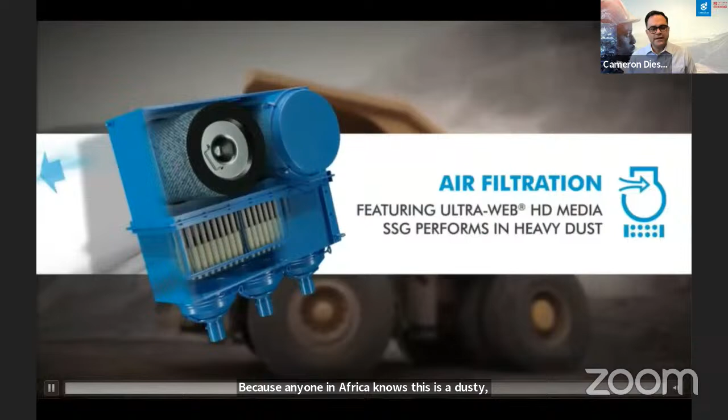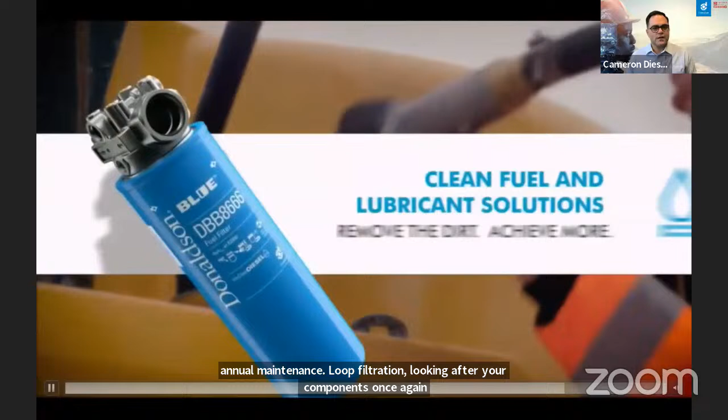So what we're going to start with is just a video showing, at a very high basic level, an overview of our service offerings, just setting the scene here. The first product you will see is air filtration, because anyone in Africa knows this is a dusty, corrosive environment. Air filtration protects your engine, keeps the dust out, keeps your engine functioning well. Critical to success. Fuel filtration, we need clean fuel to optimize your running and your maintenance. Lube filtration, looking after your components once again. Hydraulic filtration. And last but not least, clean fuel and lube solutions to make sure the fuel is clean before it goes into your system. So those are just some of the products that we do.

Moving on to the webinar for today and the topics we're going to cover. What we want to look at is reducing maintenance costs and increasing equipment uptime. In the second bullet point, you'll see the phrase total cost of ownership, and our aim at Donaldson is to reduce total cost of ownership for mines operating. One of our partners that do that, AES, will present on their customized service model and their partnership strategies to bring these benefits to their customers.

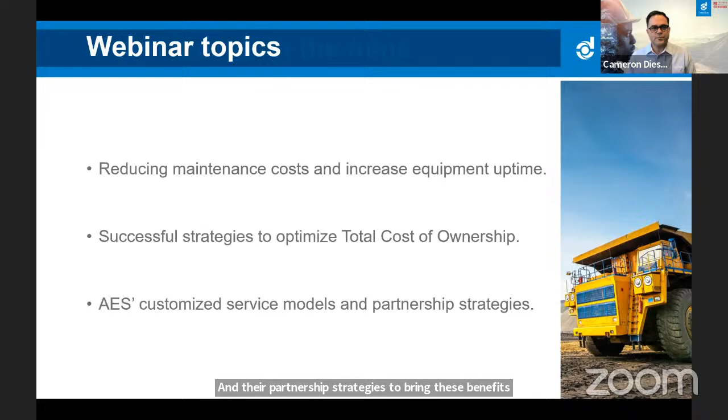A phrase that I really like, given to me for this presentation, is from the lab to the mine. Donaldson, we have all sorts of certifications that I'll talk about at the end of the presentation. We are a global company, global technology, innovating, but that means nothing to people operating on a mine. We know that the difference is made on the mine site, and that's key to us. What we want to show is how we apply validated filtration technology to optimize these mining operations, and of course, how filtration technology has the potential to advance your business.

We also think that after being in Africa for more than 50 years and operating primarily in mining, we do understand some of the challenges our customers face. Operational efficiency and uptime is always given to us as a challenge for a mine site. We know the penalties on mine sites for equipment being down, we know what those lost hours cost the mine, and we know that we need to keep machines up and running.

In dealing with that, we generally look at and improve long-term operational cost reductions—reducing total cost of ownership, as we say at Donaldson. A key for us globally is improved overall sustainability, and we believe the efforts we make on your mine site improve your sustainability while we keep that clearly in focus.

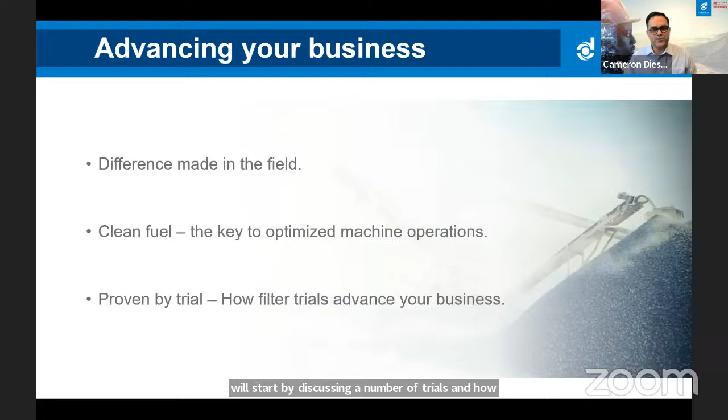A key takeaway as well will be clean fuel. We know this is key to optimizing machine operations. You need clean fuel on site to get maximum efficiency, and that's what we look at giving you. So what I'll do from here is hand over to Paul, who will start by discussing a number of trials and how applying endurance filters and various Donaldson technologies in the field has brought benefit to his customers, with examples of case studies we've put together.

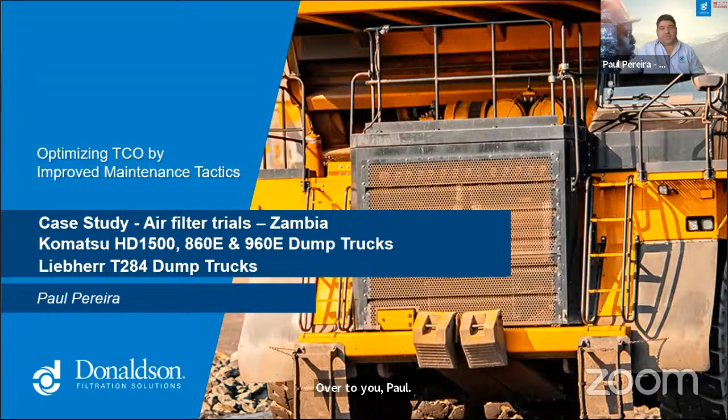Secondly, Donaldson works through a distributor network and partners globally, as Cameron mentioned. We support them as they are an extension of us, so they can offer you, the end user, the best solutions, on-the-ground support, expertise, stock in country, and so much more. We cannot do it without them, so a big shout out goes to the distributor who played a vital role in the success of this trial.

So let's get on with the case study. The case study is on air filters specifically today. We were talking about the Komatsu 860E, 960E dump trucks, and also the Liebherr T284s. So let's move forward.

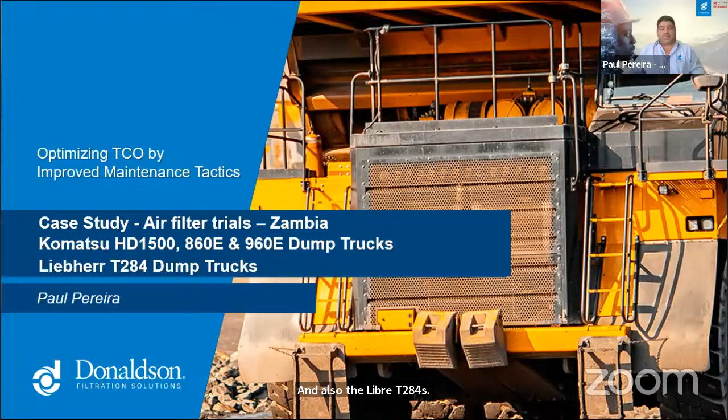The mine's challenges, what they were experiencing, was frequent maintenance which caused lots of downtime, high filter usage which means high filter wastage, and changing filters at 500-hour changeouts. They were on a cost-saving drive, and we wanted to help them save costs. So we suggested increasing service intervals. They asked how, so we said, let's do a trial—we'll show you how.

As a result, and just make note of this number and take note of the time frame, the result was a $75,000 savings only on the air filters—the 2 air filters on each machine—over the time frame of this trial, which was around 5 months.

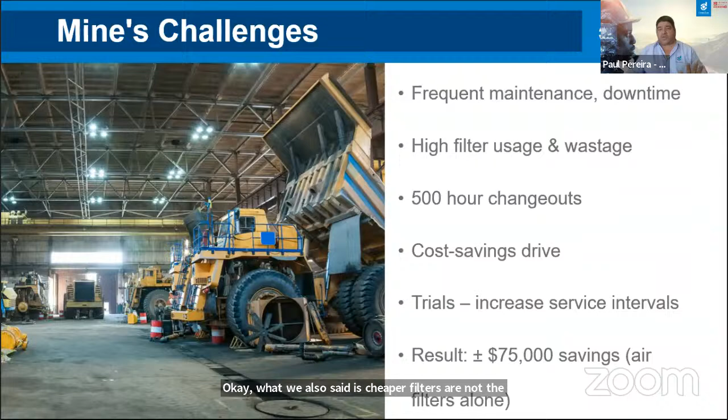What we also said is cheaper filters are not the answer, rather work on efficiency and changing based on restriction in this case. So what was the scenario on site? The scenario was that the covers were not Donaldson's, so we reintroduced our filter back into the will-fit part, which was our Donaldson SSG housing.

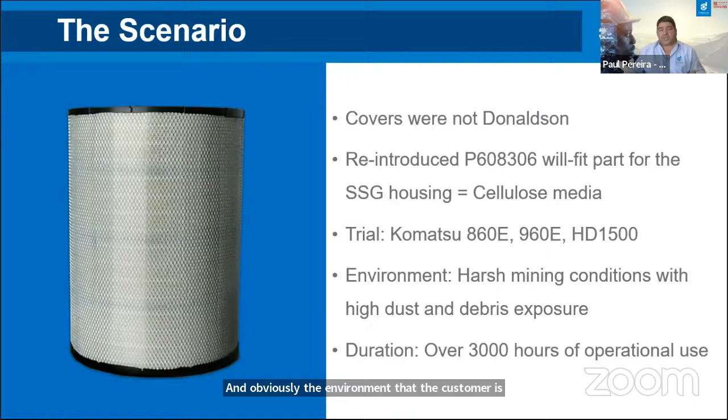It is a cellulose media filter. We did the trial on the 860E and 960E Komatsus, and obviously the environment the customer is working in is harsh mining conditions with high dust and debris. As for duration, we found we got over 3,000 hours of operational use on one single filter.

Some 'why' factors—you're asking why. Customers ask, why change? What are the benefits? How will this help us? Some of those are mentioned on the screen: reducing your component failure—you guys are going through lots of spare parts, lots of injectors. We want to extend your equipment life, minimize the downtime, and maximize your filter lifespan.

We want to increase your vehicle performance. We want to enhance the maintenance practices on site. We want to boost your environmental impact. Less filters, less waste, better cleanliness for the environment. And obviously, we want to strengthen your TCO value.

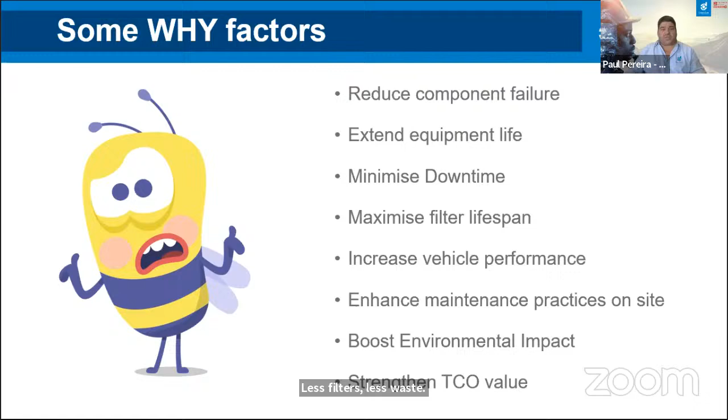I mentioned earlier about efficiency. Efficiency is something that people don't really understand, and beta ratios, so we just want to go through it so that you can understand it a bit. Efficiencies are usually printed on our cans, or it's on our website. Most websites do not have it though - I'm talking about the competition - and sometimes you've got to ask yourself, why is it not on the website? So just make a note of that.

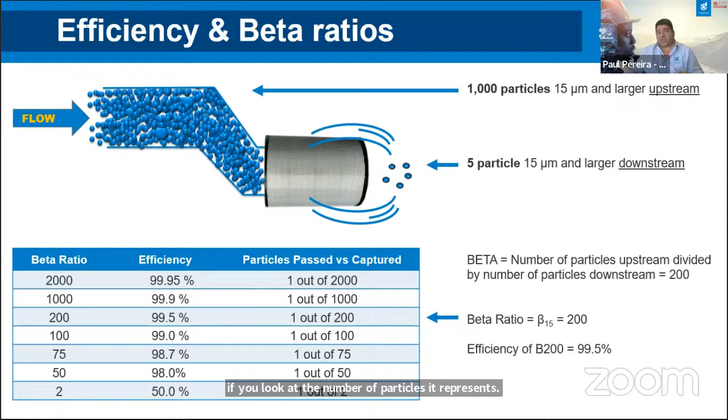We'll move over to the Donaldson First Fit. As you can see, this is a picture of a machine with a filter housing. This is actually a Donaldson housing. So we are also filter manufacturers, but also First Fit for OEs. So we actually manufacture this housing.

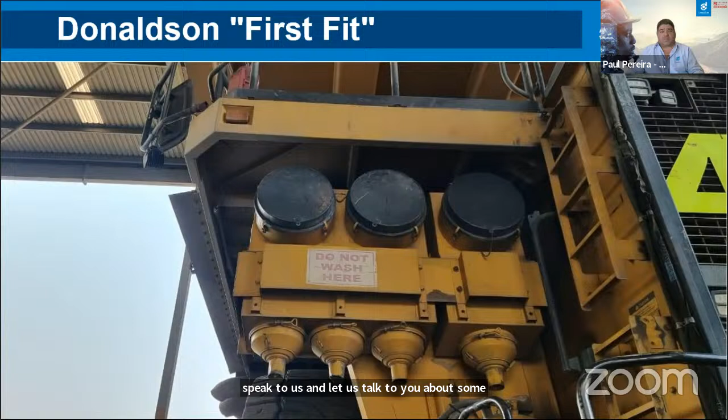This filter housing has got a pre-cleaner inside, and you can see that by the 4 little things at the bottom there, where the pre-cleaned air actually exits. So that's quite a nice thing to note. Up to 90% of all the dirt that's collected passes through the Donaldson system and exits before it actually hits the filter, so it's also saving your filter lifetime. If anybody on here has equipment that you don't know has Donaldson pre-cleaners available, and you're going through a heck of a lot of filters, speak to us and let us talk to you about some pre-cleaners. We can add evacuator valves at the bottom as well, which will help prevent the clogging of moisture.

So the primary filter and the cover that was installed on the actual machine, as you can see - sorry, I'm looking at the wrong screen - the filter has a steel cover, and this cover here was actually a lot thinner than ours. So what we did is we reverted back to the Donaldson one, which has a cone, and the Donaldson cover, which also has a cone. So that obviously keeps the filter in place a lot better.

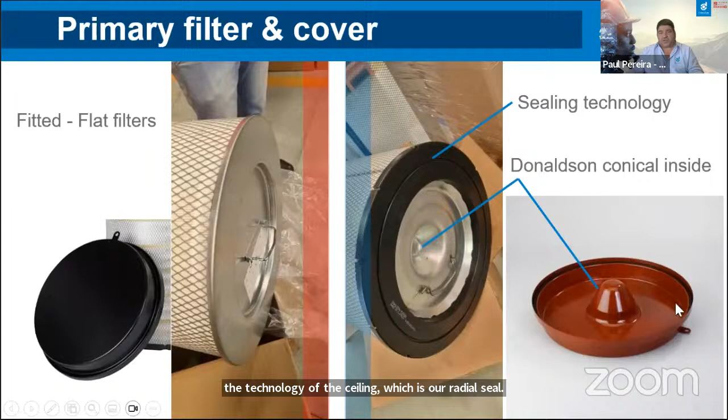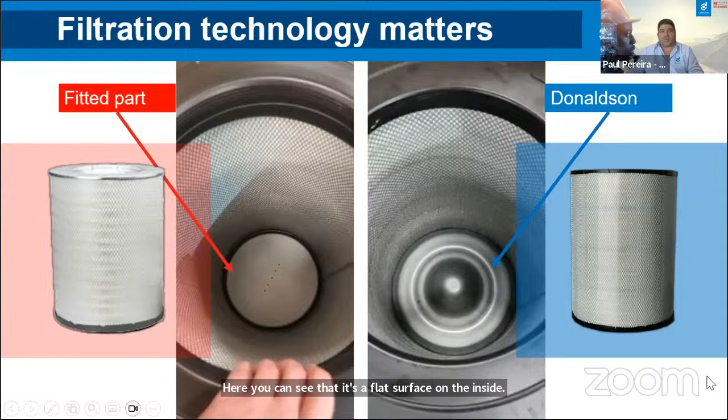And the technology of the sealing, which is our radial seal, also makes it a much better sealing surface. Here you can see that it's a flat surface on the inside of the filter that was fitted, and ours you can see obviously the cone. You'll see that the media is a white color, which tells you it's a cellulose filter. The old axial seals versus the radial seals - you can see the difference here.

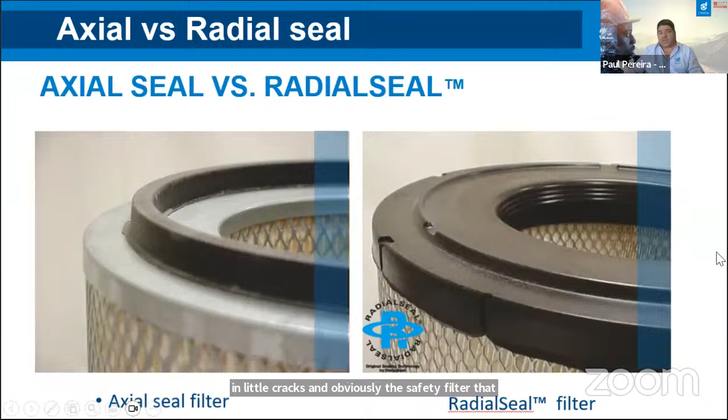The old axial seal system had a seal glued onto it, where the new system is just a polyurethane seal right around, which also holds the filter in place. But if there's a slight deviation on the seal housing or on the housing, it will touch on the whole surface of the seal. So your sealing is much better. There won't be any air coming through in little cracks. And obviously the safety filter that fits on the inside will also have a much better sealing.

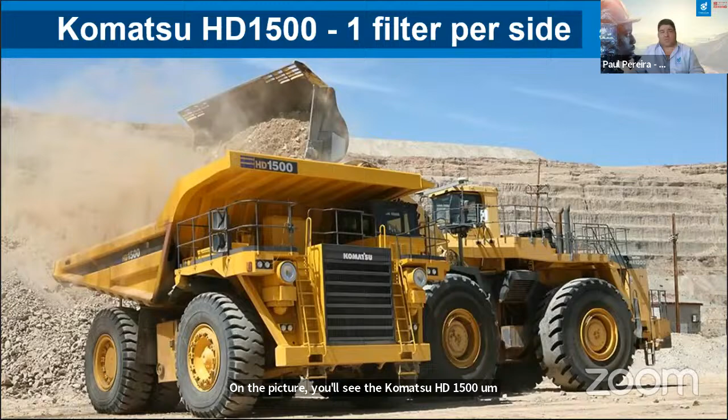On the picture, you'll see the Komatsu HD 1500. It has one filter on each side, so only 2 filters for this machine. On the Komatsu 860E, there's 2 filters per side. On the Komatsu 960E, there's 3 filters per side.

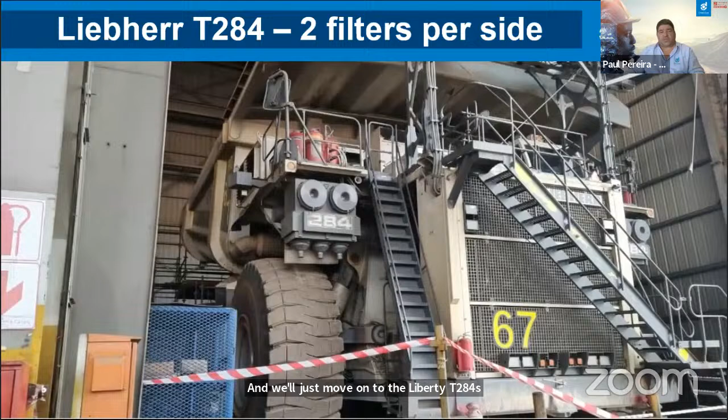And we'll just move on to the Liebherr T284s, which has 2 filters. You'll notice on the T284, you can see the dome. On the other machines, the dome is actually welded into the cover, so you won't actually see them. Some of them do come with the dome visible.

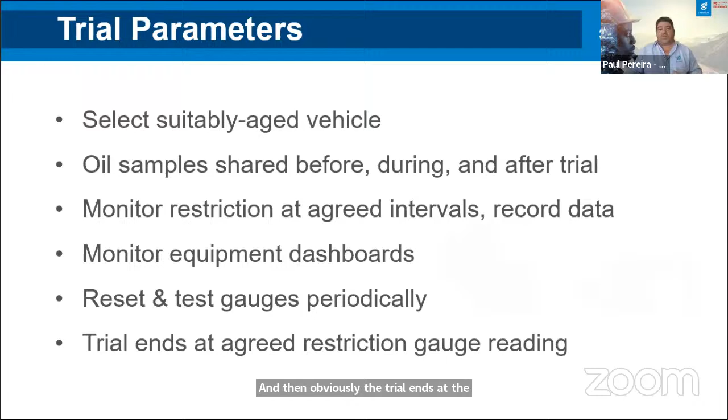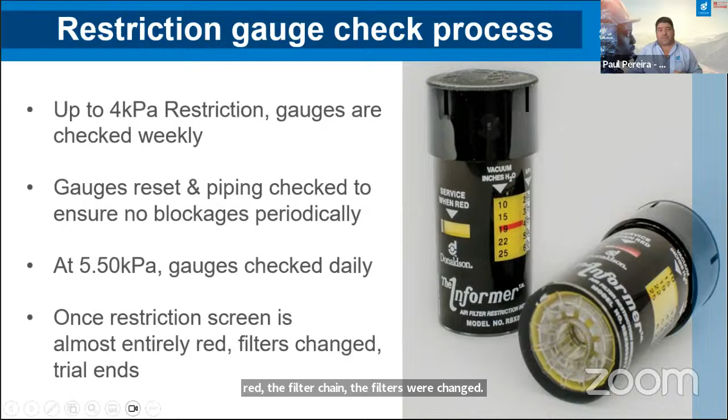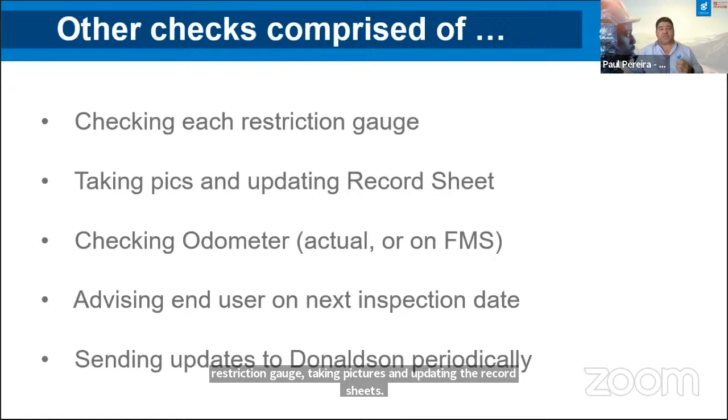Once the restriction screen was almost entirely red, the filters were changed and the trial was deemed as ended. In terms of the other checks, again, checking restriction gauge, taking pictures and updating the record sheets, checking the odometers or taking the actual readings from the FMS system, fuel management system, advising the end user when the next inspection date is, and sending updates to Donaldson as well periodically.

This is what the distributor did, our partner. They painted the covers in their colors and put a big sticker on to say, please do not change. They made nice boxes for the restriction monitors to be installed in. At the bottom here, you will see that they also did the exhaust tubing, or the tubing from the exhaust to go towards the restriction indicators. They labeled the filters or number them with the date so that they know when that filter was installed.

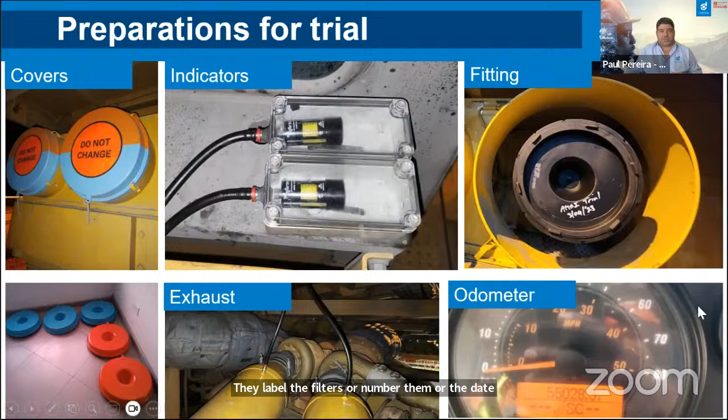You can see the other pictures there just for your info. Let's go to the actual trial results.

The first one we're going to talk about is the 860E. All the trial results will look very similar. So what we do is we start the trial. In this case, it was on April the 3rd.

On April the 11th was the first check. We skip a few and go to check number 4. The filter was already at 500 hours, still not reached restriction. Skip a few, go to check number 8, 996 hours, all still going well on May 30th.

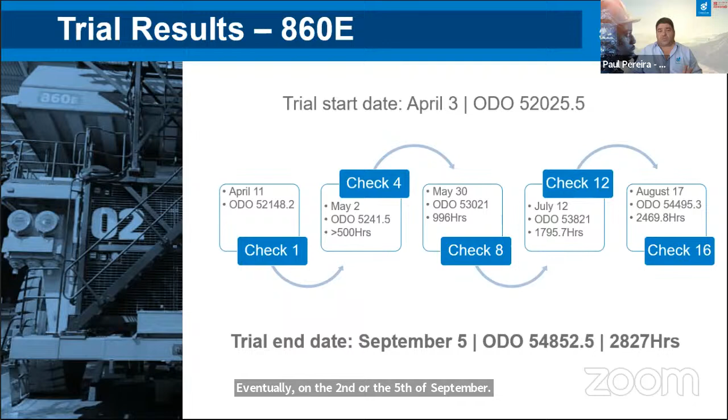Skip a few to check number 12, July the 12th, 1,800 hours almost. Check 16, the filter was sitting at 2,469 hours. Remember, practice on site is to change at 500. Eventually, on the 2nd or 5th of September, the restriction monitor was full, and they decided to change out at 2,827 hours on the filter.

What they did is they plotted the actual restriction monitor readings as well on a graph. You will notice here that one is slightly higher than the other. Depending on which way you drive on the mine sites and where you are in the world, we drive on the left sometimes or the right. So one filter always picks up the dirt from the other truck that's passing by, and that's why a lot of the filters have one side that is always getting restricted a little bit quicker than the other side.

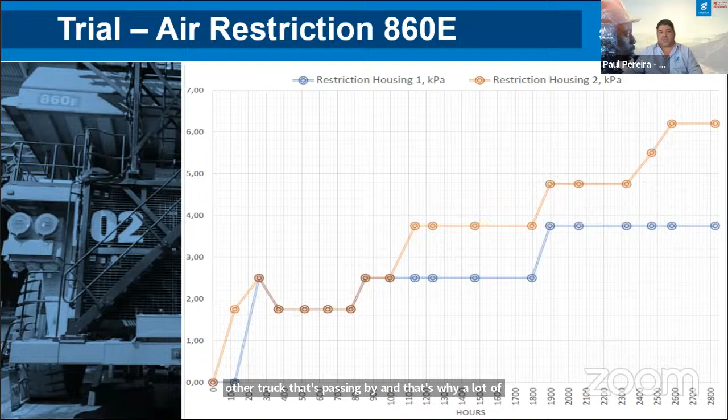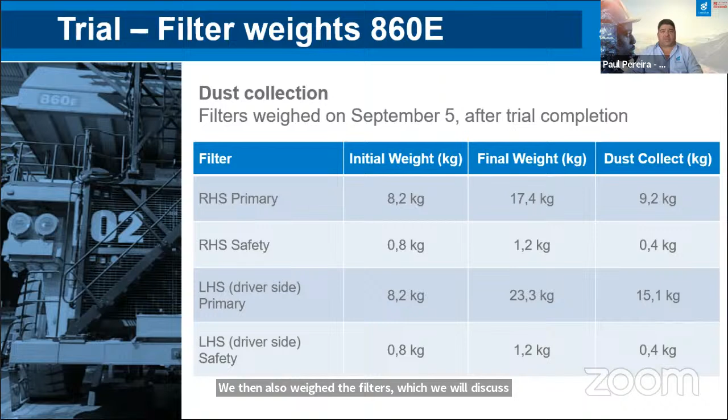We then also weighed the filters, which we will discuss towards the end. We're not going to touch too much on that, but you will see some interesting stats. The summary on the 860E was the filter got to 2,827 hours over a 5-month trial period.

The previous changeouts were at 500 hours, noting that this is a cellulose media filter, and also to note that the competitor's high efficiency filter was no comparison even to our normal cellulose filter. During this period of 5 months, where the customer had to change it every 500 hours, we saved the end user almost 5 filter changeouts, which was at a cost of $1,850 per vehicle, which is 5 primary filters and 2 safety filters.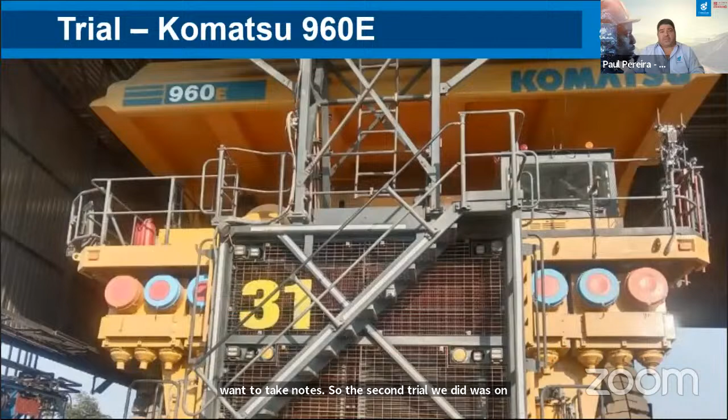We will go through those numbers later on as well if you want to take notes. So the second trial we did was on a Komatsu 960E this time. Again, same story. We did the trials, started on September the 10th. Check 1 was done at 62.1 hours.

Check 4 at 770 hours, sorry. The restriction monitor still hadn't moved. So imagine changing the filter at 770 hours and that restriction monitor is telling you the filter's not even started to get clogged yet. What a waste that would have been, if you understand what I mean by the filling up the fuel analogy.

December the 5th, 1,441 hours, 2.5 kPa on the one, 6.2 on the other restriction monitor. Check 14 on February the 12th, 2,801 hours, both restriction monitors eventually showing that it was full.

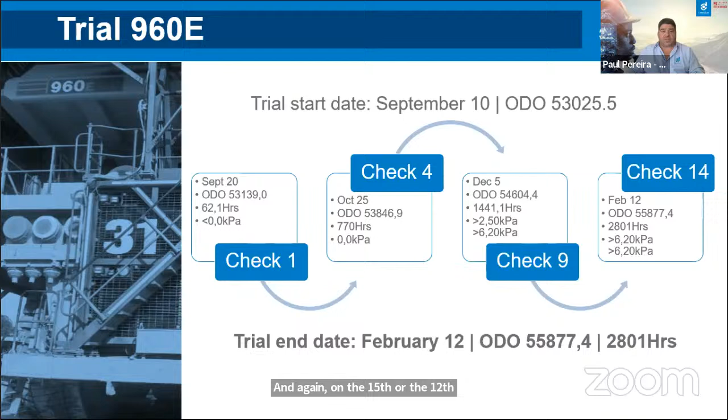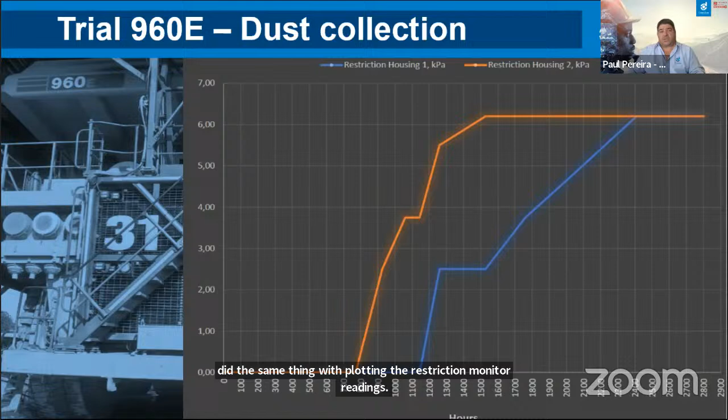Again, on the 15th or the 12th of February, eventually the trial was ended at 2,800 hours. They did the same thing with plotting the restriction monitor readings over the period, and you can see towards the end, they were eventually changed and they actually met up at 6.2.

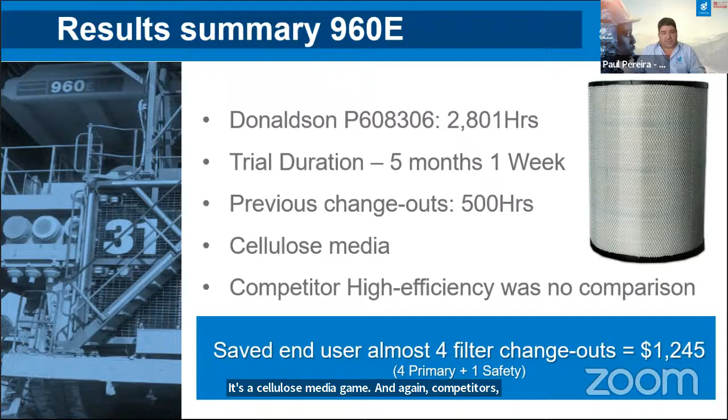The results summary, we reached 2,801 hours on this trial. It lasted 5 months and a week. It's a cellulose media again. The competitor's high efficiency filter that was on site was no comparison to our standard cellulose media. During this time, we saved the end user almost 4 filter changeouts, which is an equivalent of $1,245 per vehicle, which was 4 primaries and 1 safety.

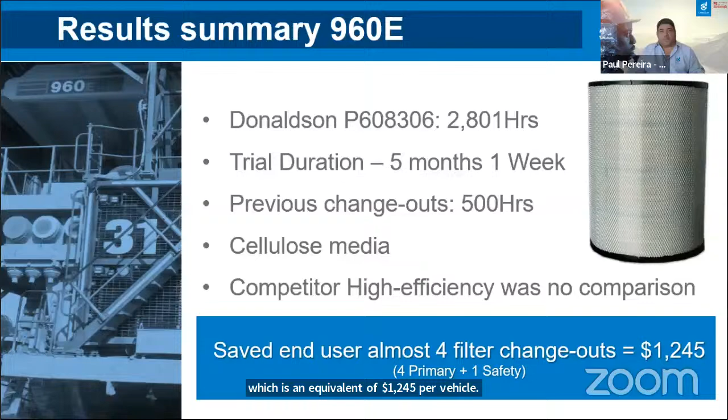Because of the success, the end user eventually said, let's do the trials on the Liebherr T284. The T284 was not considered at the time. We used the Donaldson blue filters on this trial because the OE was using the equivalent of the high efficiency filters, so we did it like for like.

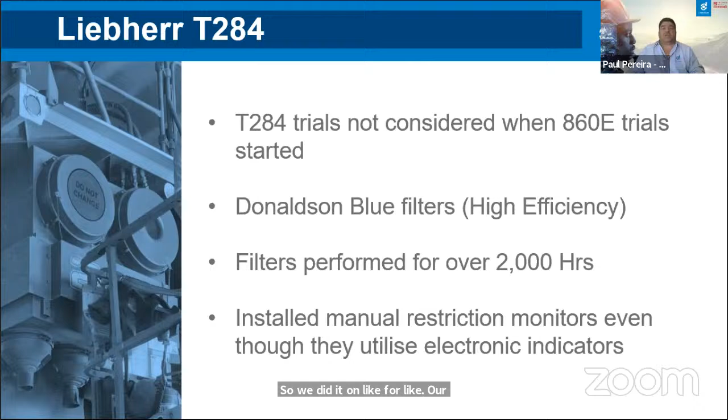Our filters performed for over 2,000 hours, and we also installed manual restriction monitors on these machines, even though they have the electronic indicators on the machines. Again, same story, June the 1st, we started the trial.

June 22nd at 416 hours, we did a check. August the 8th at 1,288 hours.

You could see the restriction monitor starting to show some restriction. September the 12th, 1,934 hours.

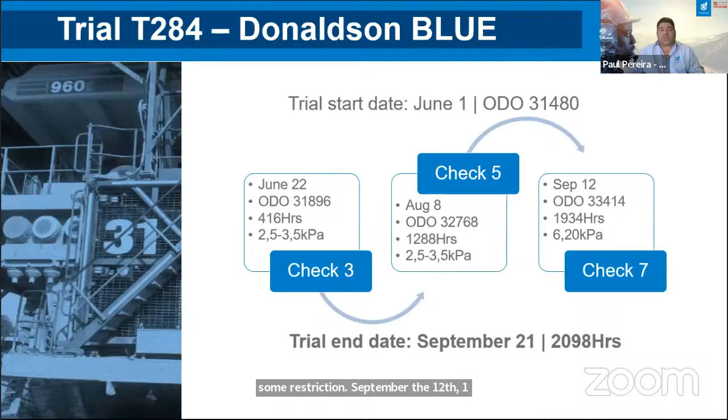They did another check, and in this case, the T284 dash, there was no signal to change the filter when it was at 6.2 kPa on the actual dashboard at 1,934 hours.

It wasn't time to service the machine, so the end user pushed it until the next service, and the next service was at 2,098 hours. The filter was still working perfectly fine, wasn't causing any starvation, etc.

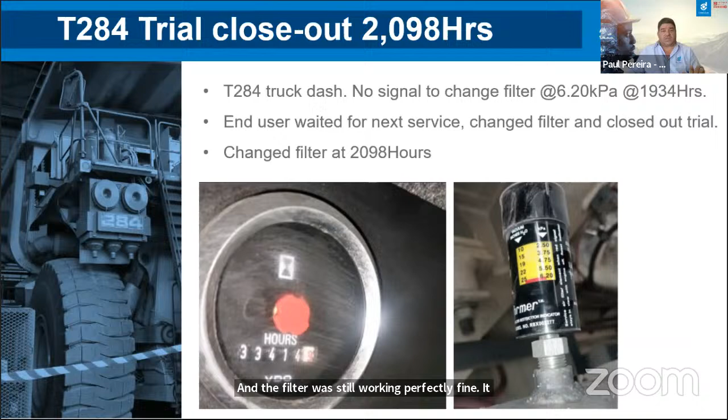No overheating on the machine, so everything was still perfectly fine, and we changed it out at 2,098 hours.

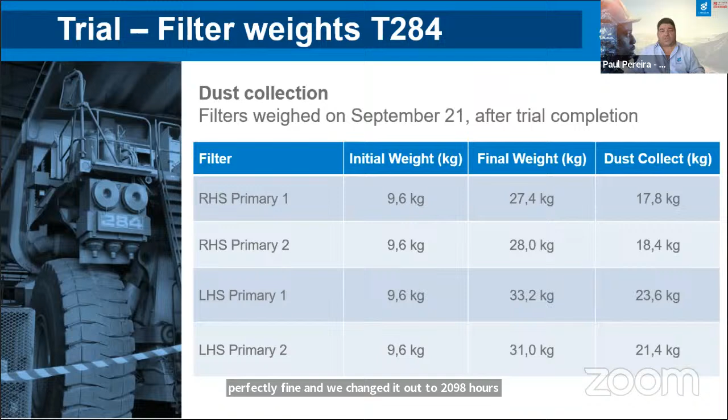Dust collection on this was as per this little screen, and we'll go back into it on the next screen because I'll touch on all three results in a minute.

The DBA, which is Donaldson Blue Air - you can see the media here is blue. The normal cellulose filter is a natural product, so that's why it's white. The Donaldson Blue product is a synthetic media, and that's why we call it the blue media, and that's why it's called the Donaldson Blue range.

This trial duration was 2.5 months, and we saved the end user 3 filter changeouts on this one, at a value of $1,840 per machine, which is 3 primaries and a safety.

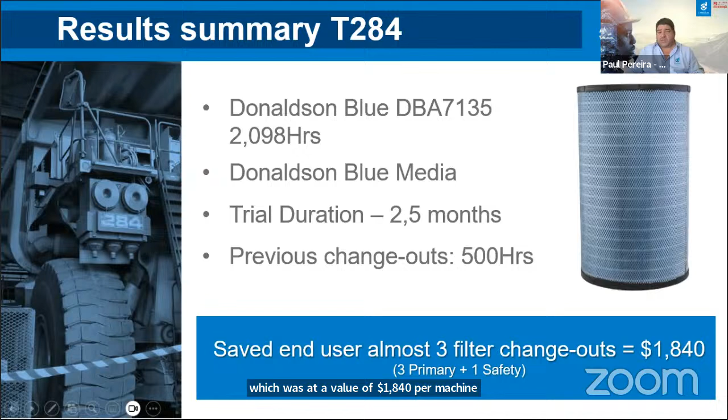So here comes the interesting part. When we talk about the Donaldson Blue range, it's depth filtration. You hear all of these fancy words - here we can see it on the actual trials.

So the first 2 filters, the white ones, were cellulose filters. The T284 used the blue filter. Over the similar time period, the dust collected on the cellulose was 9.2 and 15.1 on the 860E. On the 960E, 11.9 kilos, 8 kilos, 7.3, etc.

And look at the blue filter - over the same time period, look how much dust was collected in comparison to the cellulose media.

So this is where your depth filtration really comes into work, and that's where we'd like to explain to you guys how exactly that works, and this is where a lot of efficiency comes in. As you saw by the screen earlier, where that small percentage, 99% and 99.5%, seems very small - here you can see how big the difference actually is with those little numbers.

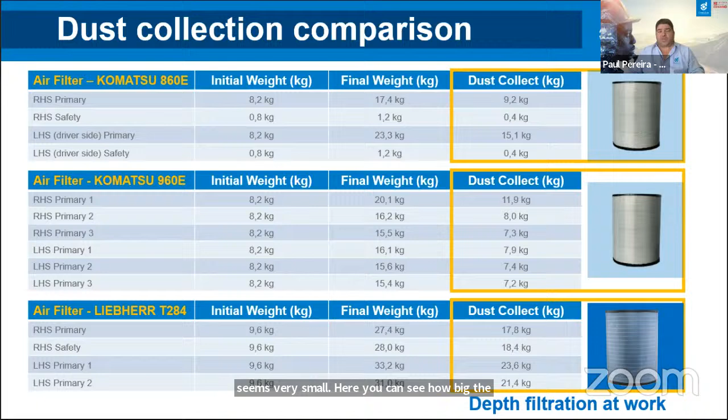Remember, we can actually double this number for the T284s because we're only at 2.5 months. So we can actually double that amount. It was a saving that was done over 5 months only, not a full year.

And it was a saving only by changing the air filters. Now remember, these exclude savings on downtime, labor, financing of filters - because a lot of mines like to keep lots of stock of filters - and any other unseen costs: $74,000.

So if you're looking to save money, this is how we can show you how to do it. And this is not even talking about our liquid filters, our hydraulic filters, our lube filters, etc. Lifespan of the machine doesn't even come into these calculations yet.

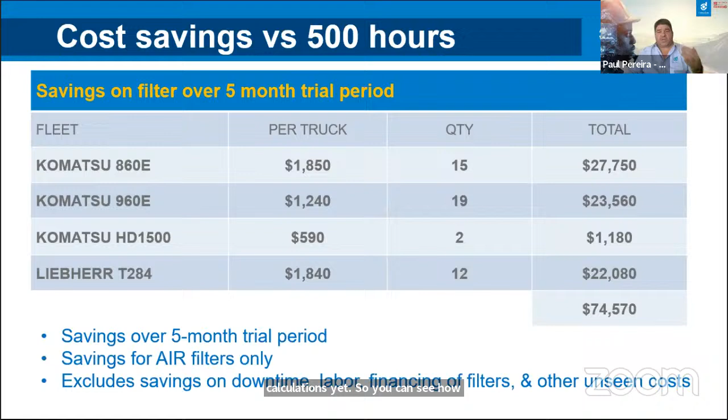So you can see how TCO actually starts kicking in by not looking only at the price of a filter. In summary, the cost savings were evident, the service intervals were dramatically increased, the mine's efficiency and productivity was enhanced, and the end user was more informed and empowered by knowing and learning all these things from us.

The trust in Donaldson on site was increased exponentially, and the TCO - in conclusion, we'd like you guys to understand and work on efficiency and TCO as the key, and not the price of the filter.

Ask your Donaldson distributors and partners for solutions to your challenges, and we will assist you. And like I said before, Donaldson is 110 years old, and I can give you 110 reasons why Donaldson should be your partner to success going forward.

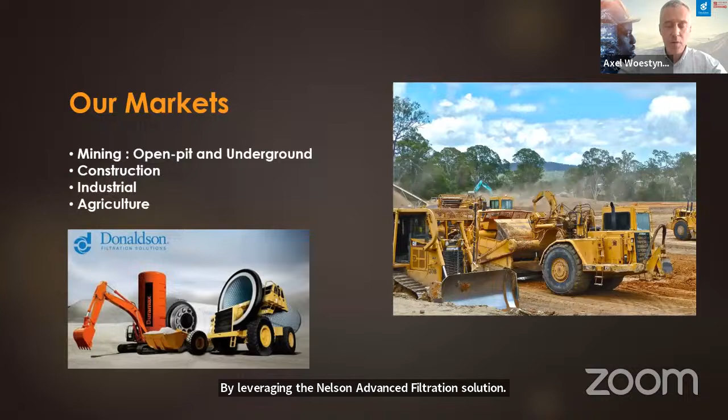Our expertise extends across various industries, including mining, construction, industrial, and agriculture. We cater to both open pit and underground mining operations. By leveraging Donaldson's advanced filtration solutions, we help our clients optimize their equipment performance, reduce downtime, and improve overall productivity.

Our facilities in the region: to better serve our customers, we have established a strong regional presence with facilities in key locations: Abidjan, Ouagadougou, Bamako, Dakar, Conakry, and Niamey. We also have a warehouse in Bamako and in Ouagadougou, and we are excited to announce that we are expanding our operations. We have a new warehouse in Ivory Coast, which is expected to open in the coming months.

We understand that every customer has unique needs. That's why we offer flexible supply chain solutions to meet your specific requirements. Whether it's FCA from Donaldson facilities, Ex-Works, CIF, DAP, DDP, consignment stock, or dedicated stock in VMI, we can adapt to your needs and ensure a seamless supply chain.

The West African market is increasingly prioritizing local content regulation. We are proud to be fully compliant with these requirements and committed to supporting local economies. Our operations and supply chains are structured to meet and exceed the standards.

Optimize your operation with AES VMI. At AES, we understand the critical importance of maintaining optimal equipment performance and minimizing downtime in the mining industry. Our VMI services are designed to streamline your supply chain process and ensure that your operations run smoothly. With our VMI solution for inventory management, we closely monitor stock levels and automatically replenish inventory to prevent shortages.

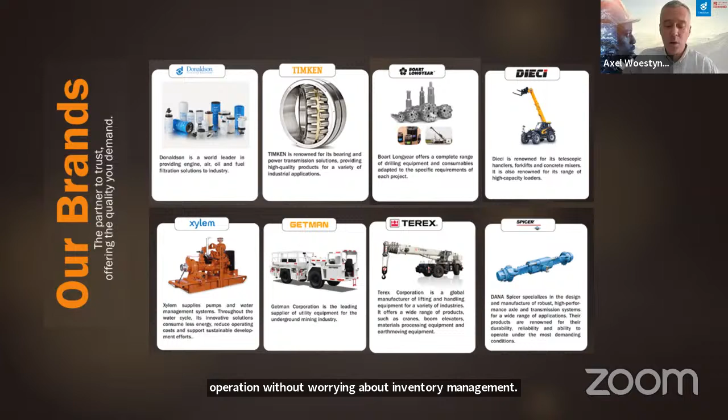In addition to Donaldson, we represent other renowned brands in the industry, such as Xylem, Getman, Terex, Boart Longyear, and some others.

Our commitment to quality and customer satisfaction has earned us the trust of leading companies in the region. Some of our key customers include Barrick, Essakane, Endeavour, Resolute, and others.

Thank you all for your time and attention. I hope you have gained a better understanding of how AES can be your trusted partner for Donaldson solutions. Please don't hesitate to reach out to me or my team if you have any questions or would like to discuss a specific need. Thank you.

So thanks for the update, and Paul as well. I trust that through the two different topics there, you got an idea of the expertise that Donaldson brings into Africa and how we benefit our customers. So thank you once again.

For me, some of the key takeaways there is we live with choices, and in this case, maybe the choice is peace of mind. If we're going with renowned partners, great technology, and we're looking at low operational costs, we're looking at reliability in quality and supply. What Axel made clear for me is it's not just the reliability of the product, it's the fact that we have reliability of supply, and at Donaldson we put a lot of effort into choosing and evolving with our distributors or our partners.

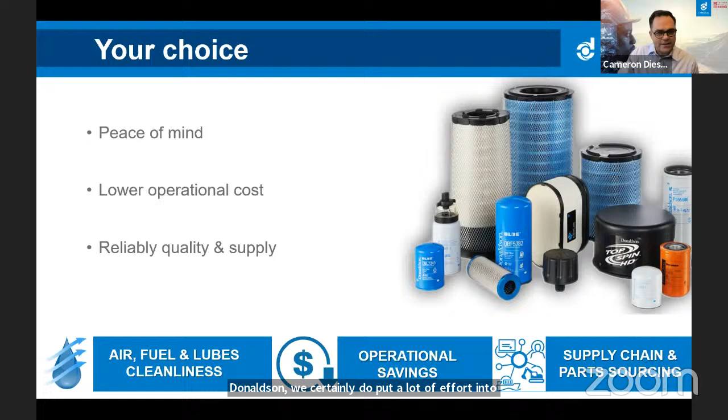So thanks again to both presenters. What I would like to discuss now in a little bit of detail is we look at that, and it's a lot. When Paul spoke about the trials, Axel's got a massive footprint there - we're talking well-established partners, well-established processes. A question may be, how would one get started on this process?

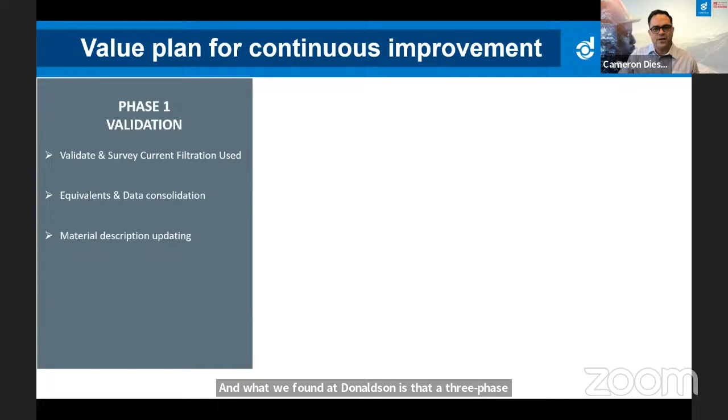What we found at Donaldson is that a three-phase approach has worked well. And every time we go onto a mine site, if anyone's been on any mine sites in Africa, you'll know that no two mine sites are the same. So this changes from site to site, but we have come up with high-level principles that we have found are effective.

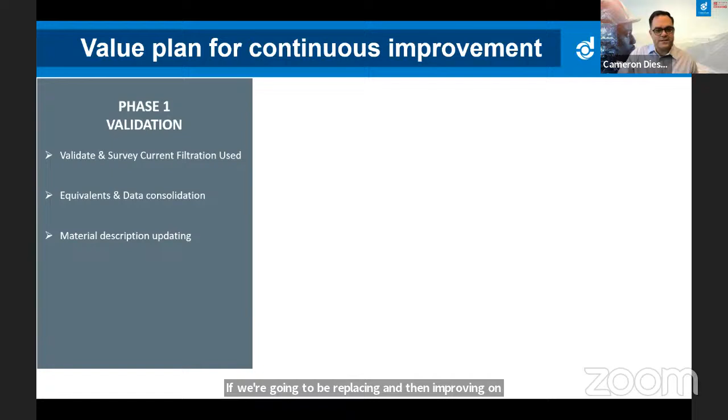Phase one is about validation. This is where we really do assess the unique operational realities and establish data-backed needs so that we make sure our solutions are precisely aligned with your environment. We validate and survey the filters that are used, we look at equivalence, and importantly we start collating data, because often there's been no data on the site and we need to understand what's happening. Also material description updating - if we're going to be replacing and then improving filters in the timeline, we need to know what it is that we're going to be replacing. So phase one is all about validation.

Phase two, we move to implementation. We've gathered some data points, and here we start rolling out a tailored improvement plan. This could involve trials for equipment and equipment assessments, all aimed at improving and providing you with practical and immediate benefits. Some things we look at: a customer's equipment survey to start with - what filtration do you have on each piece of equipment, where do we have equivalents? Paul spoke about cellulose media - do we have endurance media that would fit in the same housing and give you an immediate win? We look at cleanliness reports before and after swapping out, then present further filtration enhancements, and we implement and track these enhancements.

So that's phase two of the three phases. Phase three is where we really move to continuous improvement. We take responsibility with our distribution partners for monitoring progress, providing consistent updates, sometimes in the form of a monthly meeting - however the end user would like to engage with their distribution partner, their filtration partner, we work with them. We evaluate and move towards extended service intervals and continuous improvement. These are two key elements of phase 3.

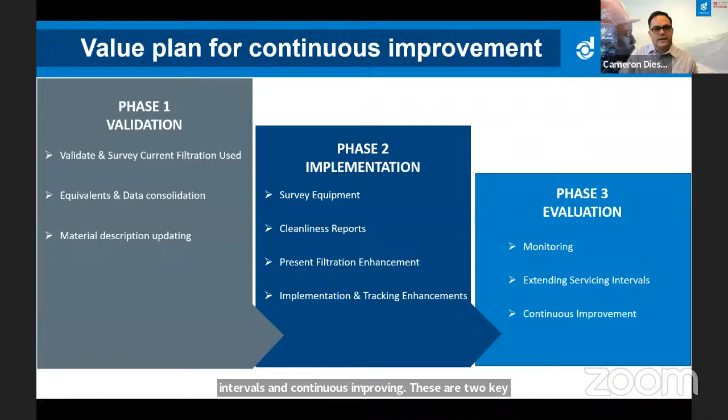And there's more, because we know that it doesn't end there. So what sort of support do we offer? In terms of the 3 phases, and even beyond, we heard Axel talk about ERP system integration - if required, it's certainly one of the options we have. On-site stock holding, we heard VMI, an acronym we use often at Donaldson, is vendor managed inventory. After hours service - this is where it's key that we have the right local partners, because people with feet on the ground near your mine site are the best to offer you the service you need. Again, monthly meetings with planning and supply chain to make sure inventory is running well, and regular interfaces with the maintenance team. We need to speak to the people on the ground, if possible even equipment operators - the more we learn about the equipment, the better support we can give.

And when we move over to the second leg of our support that we propose, it's technical support. Yara spoke about it - monthly reporting and meeting with a customer. We want to monitor the ISO levels, we want to do ongoing equipment surveys, and if we have the right detail, we can measure filtration spend per ton mined.

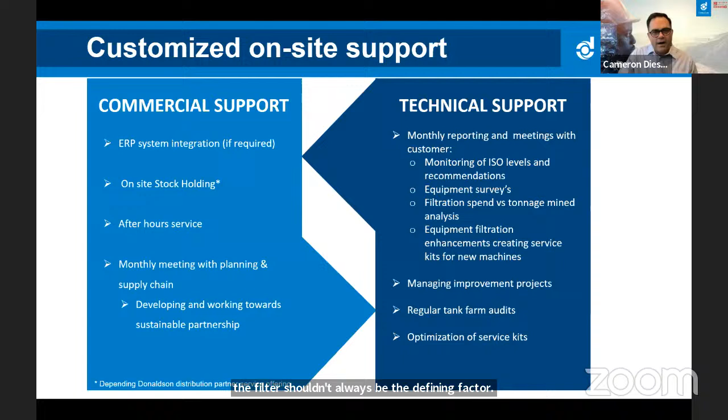And that we find a really interesting measure, I'll refer back to Paul. He mentioned the cost of the filter shouldn't always be the defining factor. An endurance filter is going to cost you more, but if you look at the tonnage you're mining with an endurance filter, the ton per hour, the cost per ton gets far lower.

So these are the sort of things we look at. We want to manage your improvement projects with you. Let's put the filtration in, let's monitor it, let's manage it with you.

Regular tank farm audits, clean fuel is essential. In sharing my experience in other parts of the world, fuel seems to be cleaner - Australia, Europe. We know across Africa we still have gallons and liters, thousands of liters of contaminated fuel, even with the best preparation. This is what's delivered to site.

And regular tank farm audits, we want to help you filter what goes into your tanks, help you polish it while it's in the tank, and then help you filter it on the way out again. We measure the cleanliness and offer the right filtration to improve on it.

And one of the things we've seen massive benefit with when we work with our partners is optimization of service kits. Our experience is that the operator of the equipment just wants to know he's having a 500-hour service. Our partners are defining the optimal composition of that service kit, upselling on endurance media, doing whatever, but importantly, the end user and maintenance people are getting the kit and not having to worry about any of the detail of what's in it.

So that's the sort of commitment we offer beyond what we've been told today. What I'd like to do now is shift gears, and we will move to a Q&A in a few minutes. But we've spoken a lot about Donaldson, premium and global, so I'm not going to bore you with a lot of corporate slides - just 3 or 4 that give you a high level of some of Donaldson's key factors.